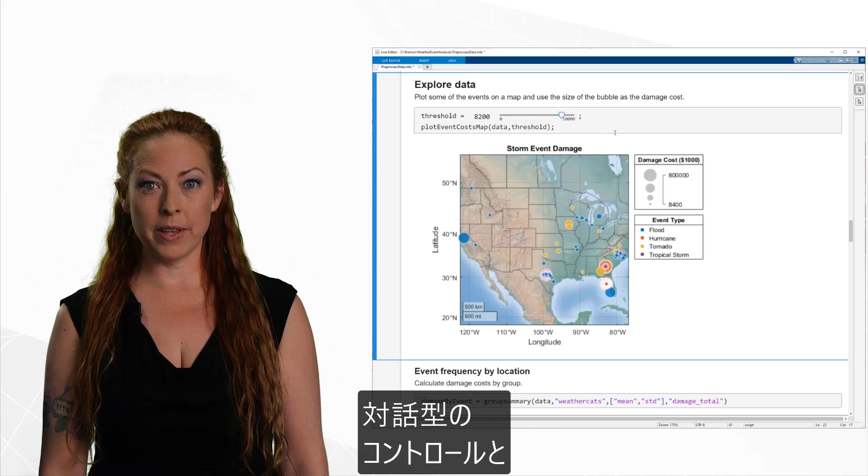The Live Editor is a great example of this, a notebook environment that helps you quickly explore your design space with interactive controls and embedded outputs. You can also use Live Editor tasks. These are small apps that you can embed right into your script that do the coding for you.

Thinking back to Tanya's keynote, maybe we want statistics related to air quality based on a location. The Compute by Group task will come to the rescue. You select the groups, the variables, and which calculations to apply to each group, and you do all of this without writing any code yourself. Of course, the task will automatically generate the corresponding MATLAB code for you, so you can reuse it later.

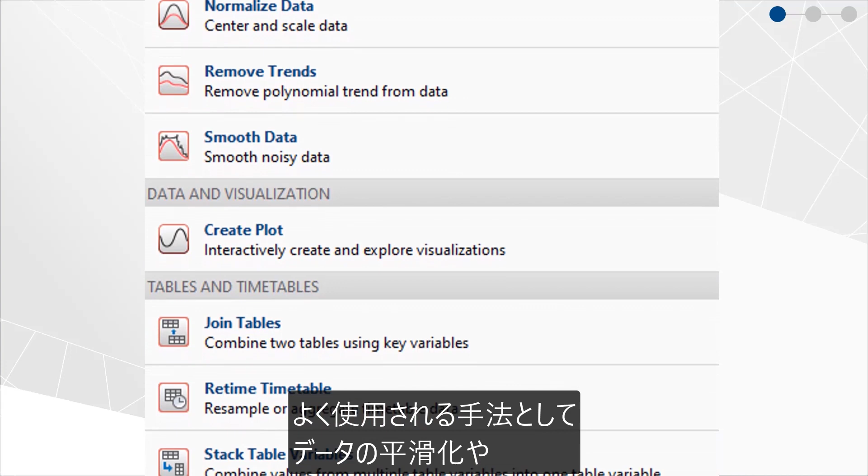There are dozens of tasks for common work like data cleaning and design, the sorts of things you tend to experiment with and try different techniques on, like smoothing, resampling and synchronizing data, clustering, and more application-specific tasks like controls, predictive maintenance, and filter design.

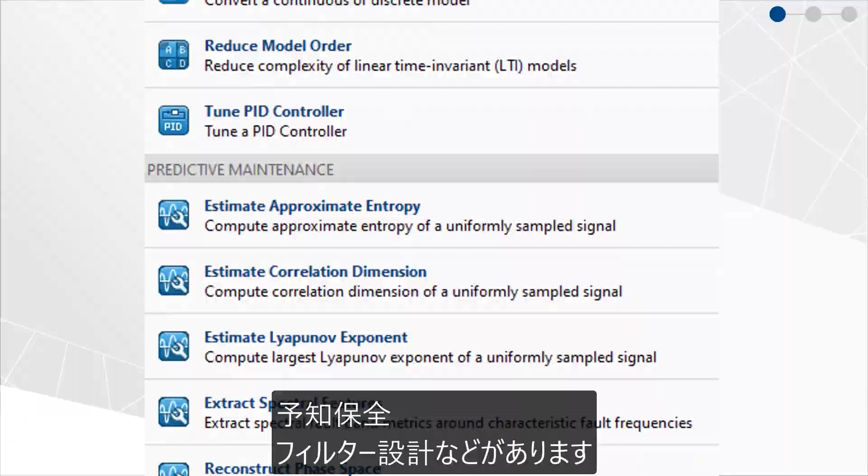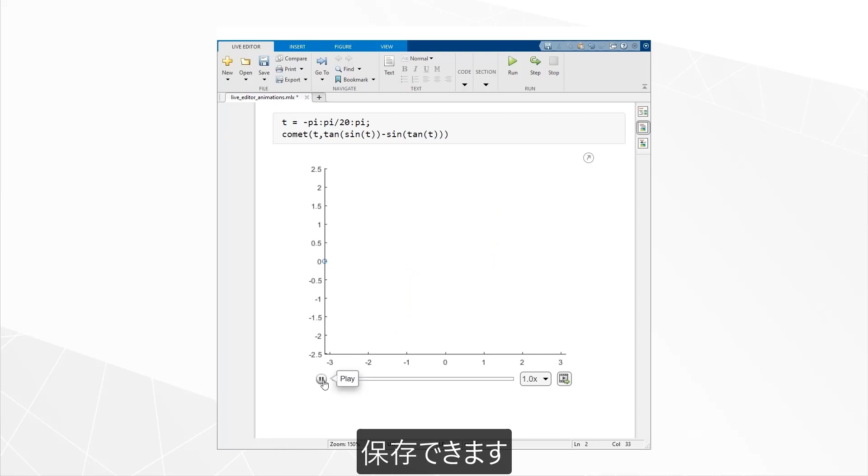Live tasks aren't the only ways to interact with scripts. We mentioned the interactive outputs. You can now animate outputs with playback controls, then save it as an animated GIF or a movie file just with one click. This makes creating and saving animations much easier, especially if you've ever had to capture frames in a loop like in the old days.

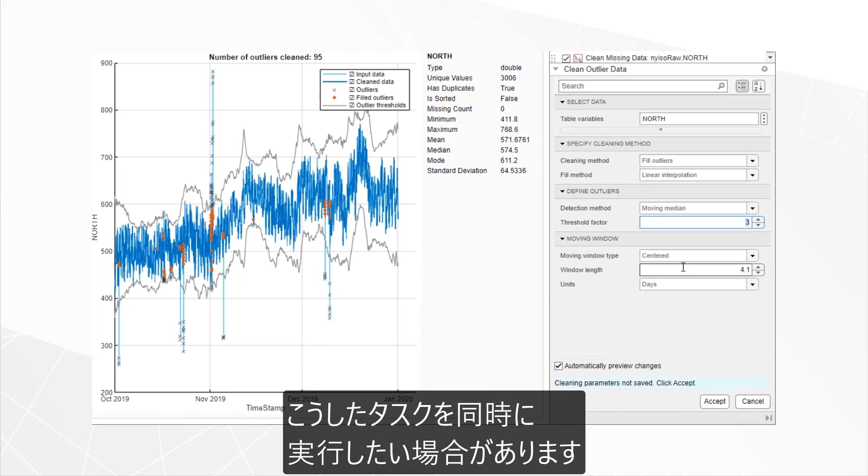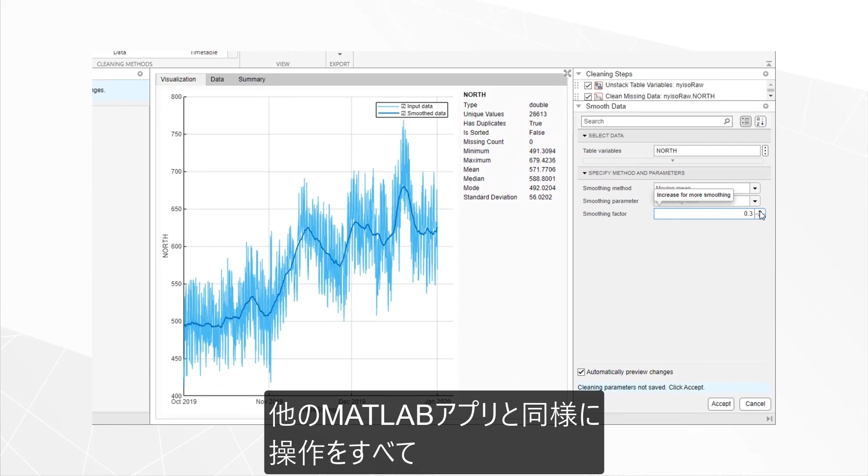So we talked about tasks that clean up your data, like smoothing and resampling, but often you want to do all of these tasks at the same time, and that's where the Data Cleaner app comes in. You can experiment, try different methods, just like we saw with the live tasks, but all in one place. And just like other MATLAB apps, it keeps track of everything that you did. So when you're done exploring, you can generate the code and use that to automate the process later on.

Now, that's not to say we don't care about coding. Even coding is easier in the traditional editor, starting with those code suggestions that you saw before. No need to stop and look at the documentation when you're on a roll.

Then let's say you want to edit several variables. You can make a single edit that applies across all the lines you selected. When you're finished exploring and you're ready to make a function, you can select the code and convert it. And once you have that function, you can easily debug it using an inline tool with many options for navigating and updating to help make coding even easier.

With Simulink, our goal is to help you spend as little time and effort as possible to build and edit your models. You should be able to focus on your work and not the tools. In other words, we want you to edit at the speed of thought. So with that in mind, we've added a new tool that makes it easier to navigate around your models.

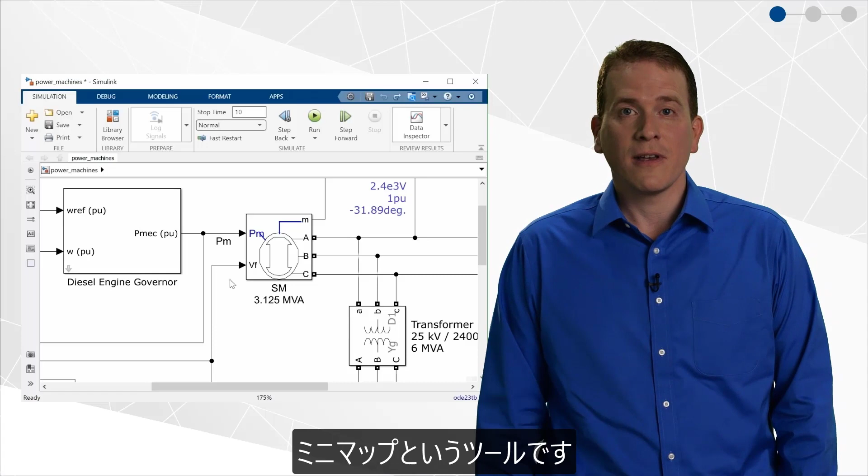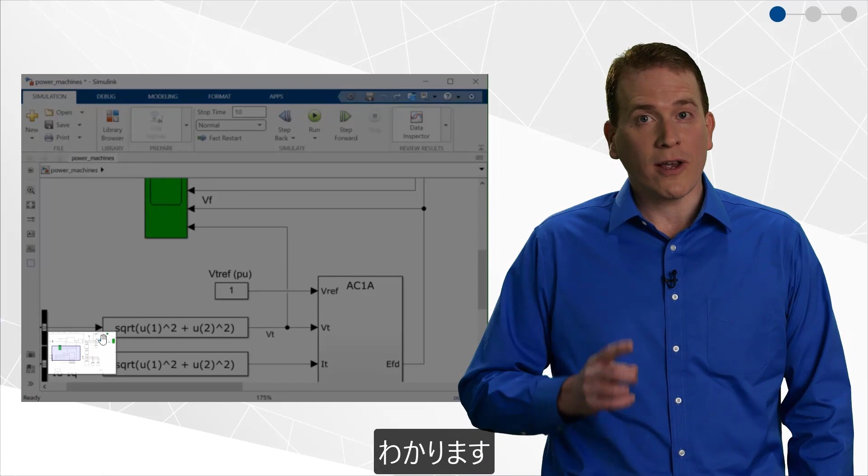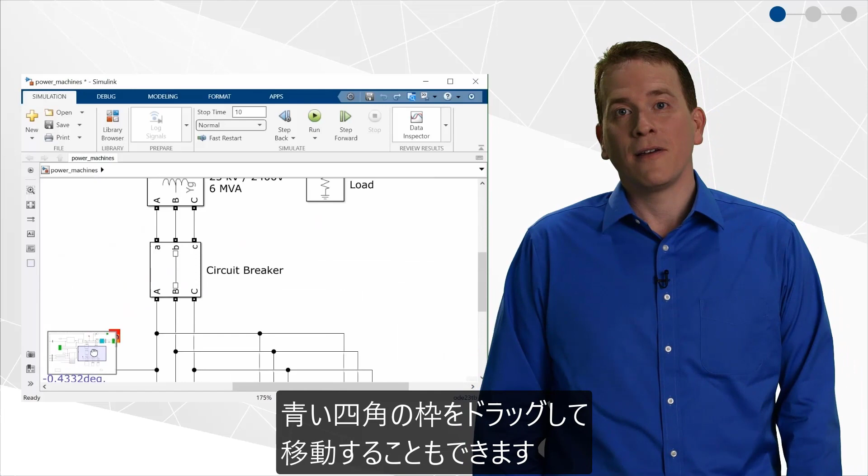It's called the Minimap. The Minimap automatically appears on the lower left of your screen when you pan around your model. At a glance, you can see where you are in the model by looking at the blue box. You can click anywhere in the Minimap to go to that place, or drag the blue box around to pan around that way. Once you're done, the Minimap automatically goes away until you pan around your model again.

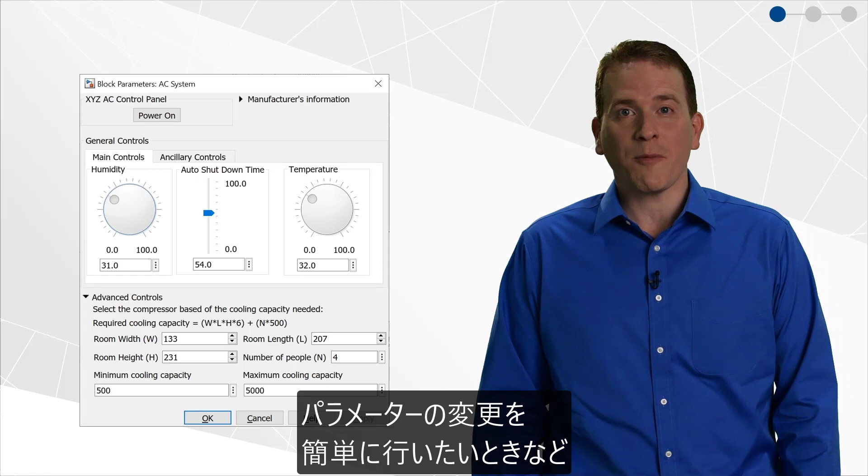For model creation, we've made a big update to the masking editor. Masks, as many of you know, are what you see when you double-click on a block. And if you create your own custom masks to make it easier to access and change block parameters, I think you're really going to like the improvements we've made.

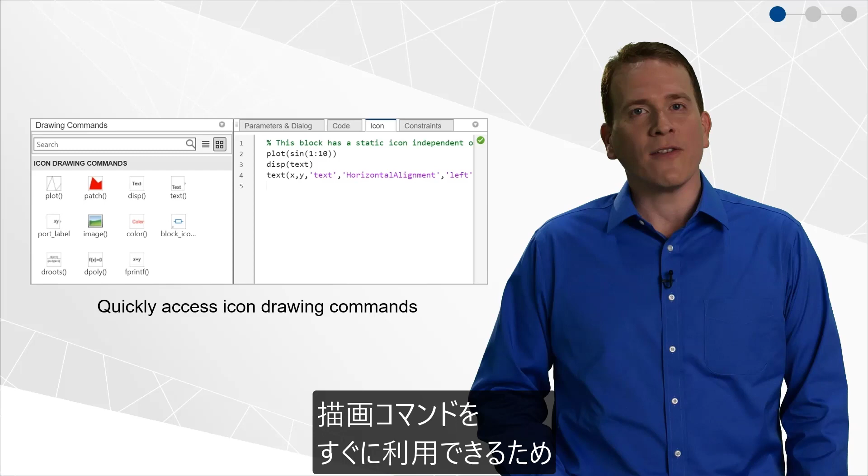First off, you can now copy a mask from an existing block. That way, you can pick a mask that's close to what you're looking for and then tweak that instead of starting from scratch. When you're creating the icon for the mask, you'll have quick access to the drawing commands so you don't have to remember them all. And if you really want a high level of control, you can now add constraints, like restricting parameters to specific data types or values.

All right, so we've gone over some things that will help you explore through your designs. Now, as designs evolve, they grow, both in size and complexity, which means you need to scale up your work and collaborate with others. The good news is that both MATLAB and Simulink grow with you as your needs grow.

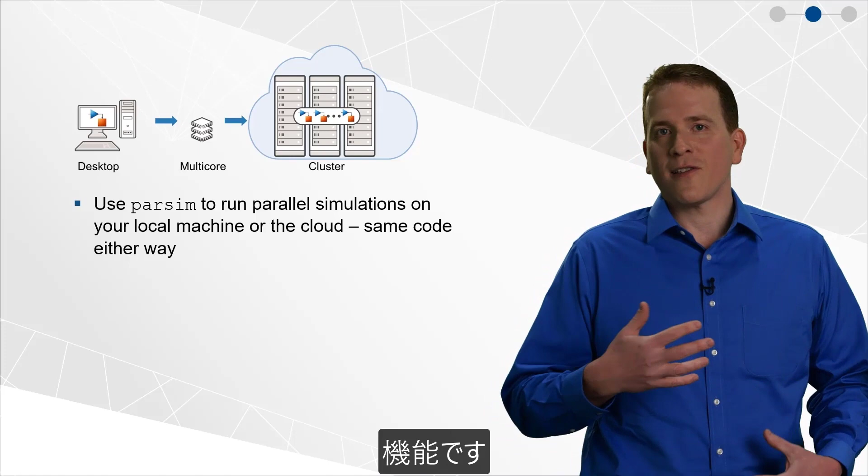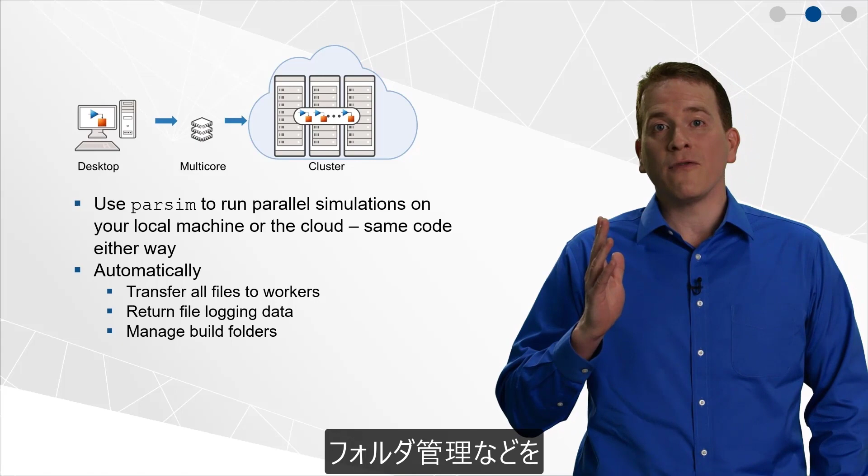A great example of this is running multiple simulations in parallel. Back in 2017, we released a feature called Parsim that makes it easy to run parallel simulations on your local multi-core machine or on the cloud with a full cluster of machines. It's the same code either way. Parsim automatically takes care of things that you had to code before, things like file transfer, logging, and managing build folders. It could all be done with a few lines of code.

But we asked, how can we make this process even easier? Introducing the Multiple Simulations panel. This is a new UI in Simulink for setting up multiple simulations, no code required. Just specify the parameters and variables in the model you want to change for each simulation, and then kick off a job and monitor its progress with the simulation manager.

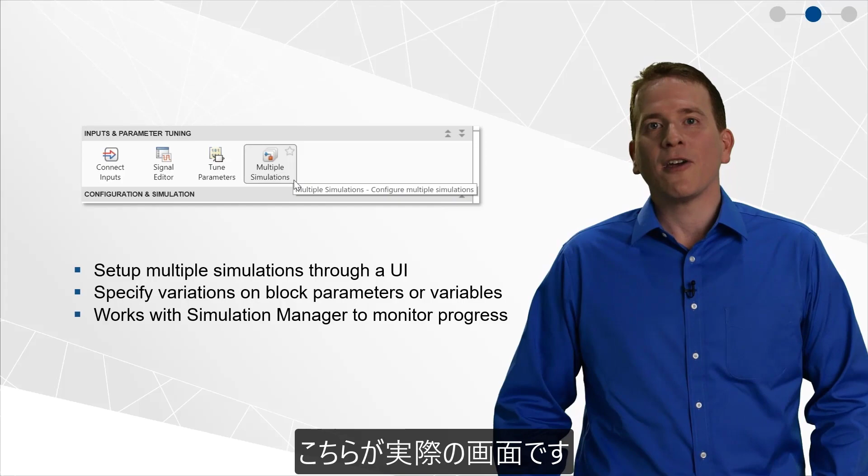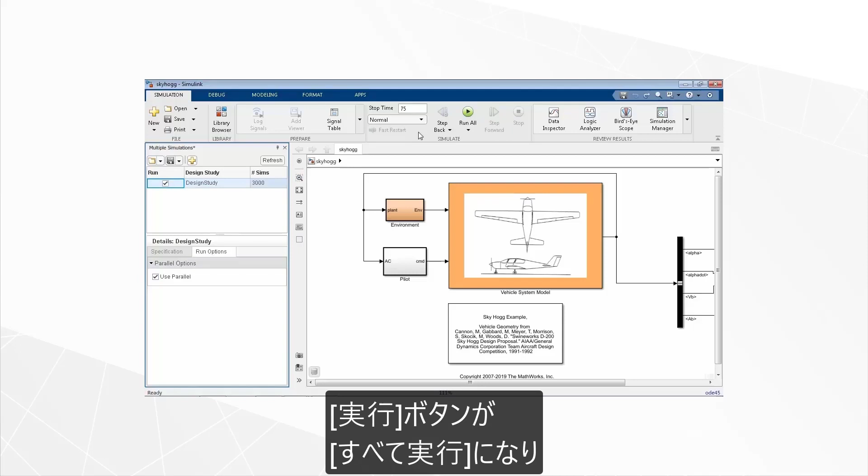Here it is in action. You open the Multiple Simulations panel, create a new design study, and then specify which parameters you want to change. If you want to run the simulations in parallel, just check the box on the Run options. Once you activate the design study, the Run button turns into the Run All button, and clicking that starts the job. The simulation manager shows the progress and automatically plots the results as each simulation is completed.

Thinking about those multiple simulations reminds me, if you've ever had MATLAB blocked by some long-running process or code, you're going to love this next update. You can run code in the background through multithreading, which was introduced in the last release. Here's a great example of importing lots of data, which normally would take a long time to run, and during that time, the command line would be blocked. Now you can use parfeval and other parallel functionality in MATLAB, so the code can run in the background.

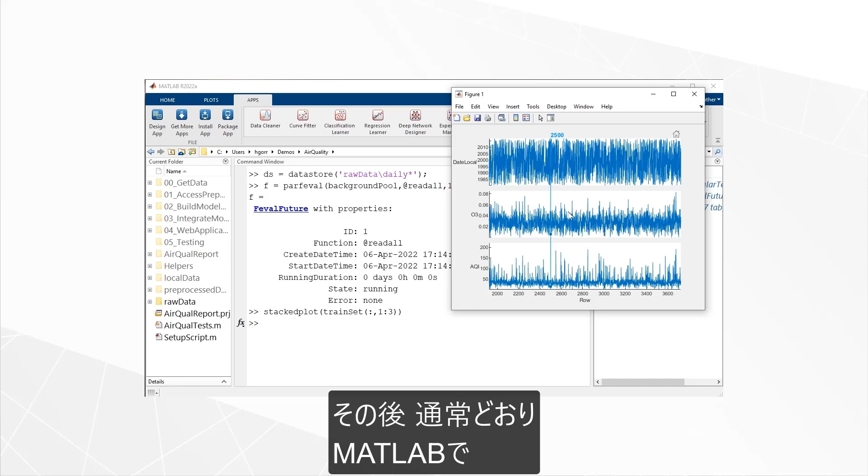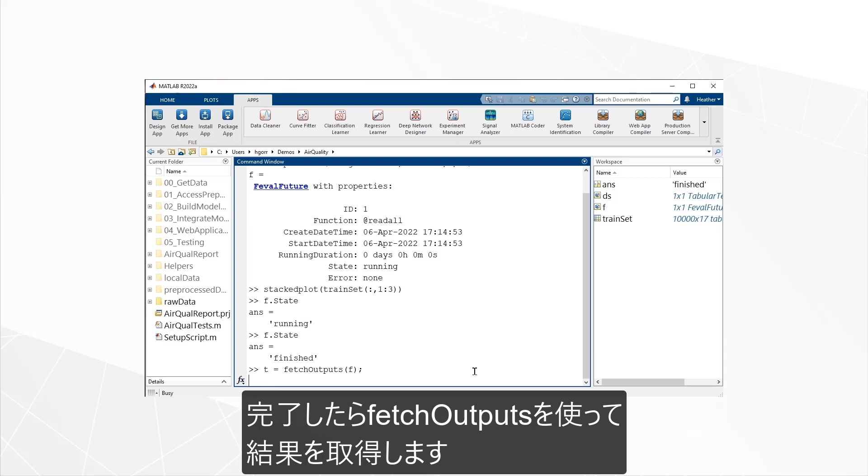Then you can continue to work like you usually do in MATLAB, like visualizing data and zooming and interacting with the plot. And you can check the status. Here, the data is still being read. Well, since it's still running, let's just keep going. Here, we're training machine learning models using an app. And once it's finished running, you can use fetchOutputs to get the results.

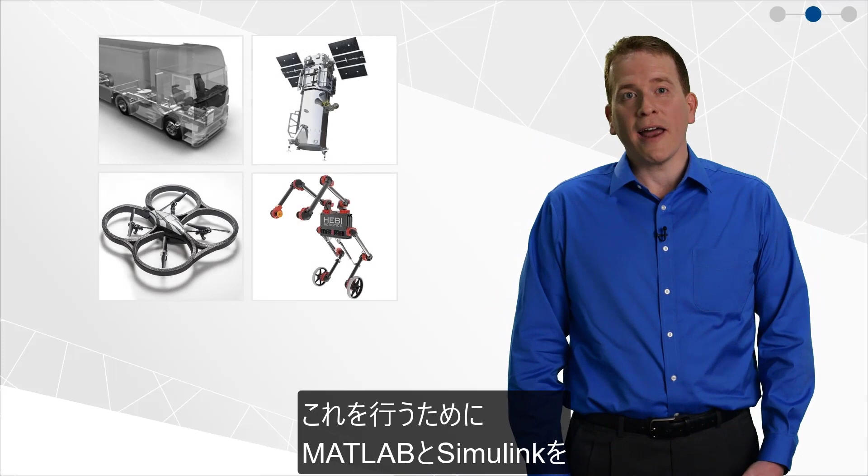So we've gone over new ways to scale up your simulations and computations. But scale is also about the scope of your design and building up a full model of your system. To do that, MATLAB and Simulink are often used together with other programming languages to design the different components that make up your system.

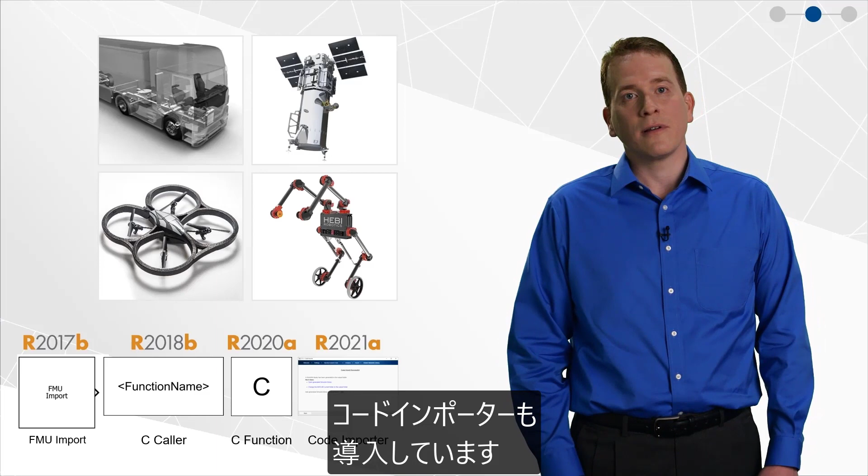Over the last several years, we've created several blocks to bring in FMUs and C code. Last year, we also introduced a code importer to guide you through the process of bringing in custom code. And this year, in 22A, the C function block now supports C++ code, which further expands the type of code that you can bring into Simulink.

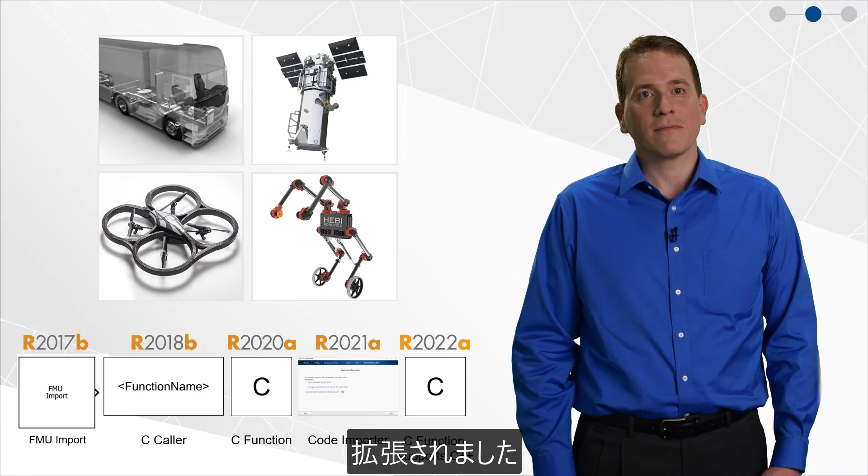Another big area of focus in language integration is using MATLAB with Python. It's gotten a lot of love over the last few years. As of last release, you can run commands and scripts using pyrun and pyrunfile. This just makes it easier to integrate.

You can run Python code from MATLAB now, no matter how it's organized, whether it's a bunch of commands, a script, or a module. And when you're going back and forth between the languages, you can use the syntax you're most familiar with. You can use name equal value syntax to pass arguments throughout MATLAB, including in Python expressions.

And when you need to make changes, it's even easier to edit that code. The MATLAB editor now displays Python files with proper syntax highlighting. So you'll see the keywords, strings, and comments, and it even auto-indents and highlights delimiters to help view and edit the code no matter the language.

Of course, a big challenge with these integrations is how best to represent your data. We're always thinking about this and improving here, and one of the latest updates is for list and tuple types, which are very generic data types. So you need different options to convert those to the MATLAB type you want.

And now you can convert string and numeric data directly. And that's gotten even faster. MathWorks is always thinking about improving performance, and that's even true for the language integrations. This release, you'll notice the type conversions will be even faster, especially with larger multidimensional arrays.

Now we're talking about multiple languages, obviously things are starting to get complicated. And as we think about scaling and collaborating, testing code also becomes more important. Of course, unit testing capabilities have been around for ages in MATLAB. It's important to test our own code base. And this improves each release, becoming more and more friendly to any skill level.

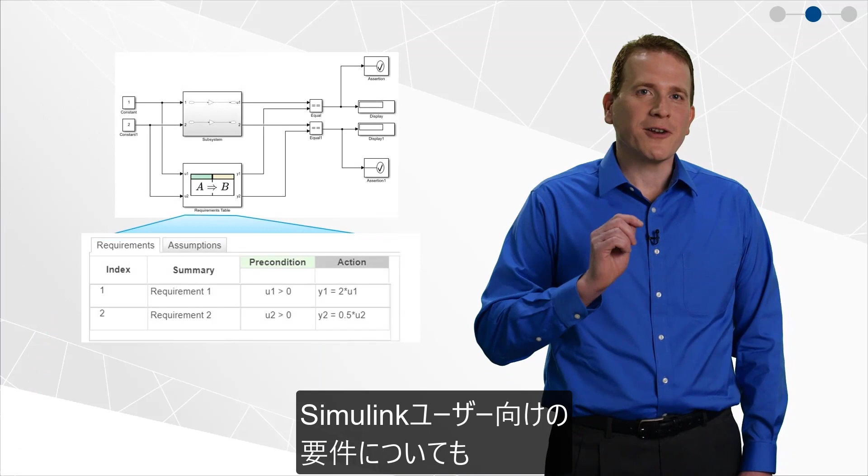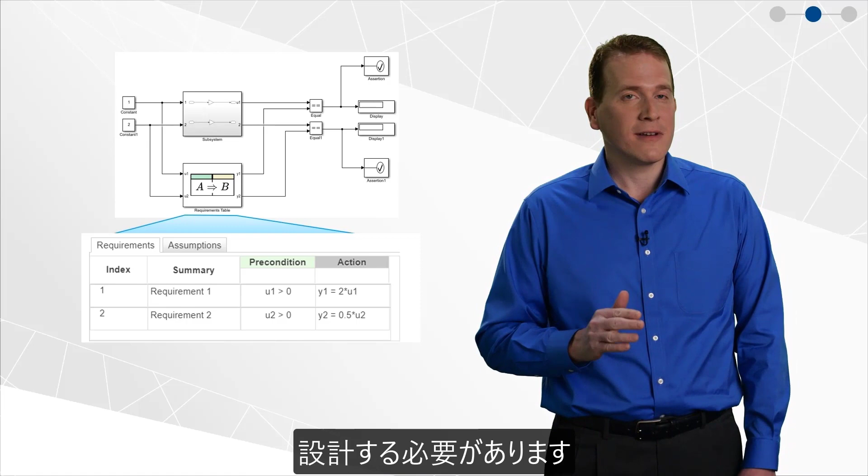We have something new in the area of requirements for Simulink users too. When you're designing your models, you want to make sure that the actual model behavior matches the required model behavior. So in 22A, we're introducing the requirements table block to do just that.

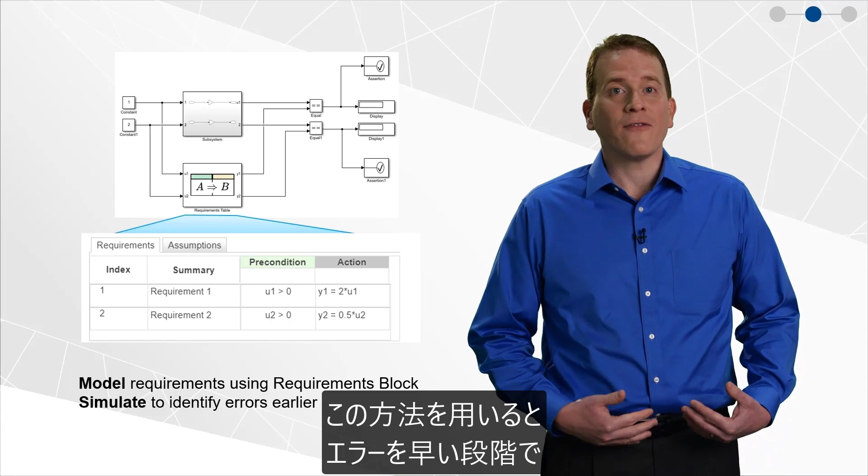With this block, you can model requirements in Simulink to evaluate logic both before and at runtime. That way, you can identify errors and fix them as early as possible, and be assured that your design requirements are both correct and consistent.

So these are just a few of the new ways to scale up your simulations and computations, work with other languages, and develop in a more collaborative way.

In this last section, we'll go over how MATLAB and Simulink can help you share all of your hard work. We spent a lot of time talking about features that we've made at MathWorks, but there are also features to help you make your own features.

Users love the live editor tasks we showed earlier, and now you can build your own custom live editor tasks to do whatever you need.

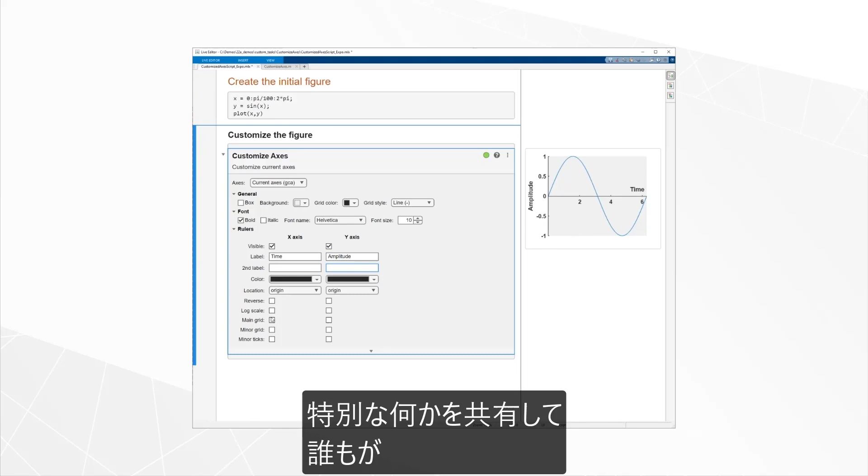This is a great example from Yair Altman, a frequent contributor on MATLAB Central. This task adds to the interactive capabilities for customizing the axes of a figure. Imagine sharing something specific with your team or research group, so everyone can create the same kind of plots with the same options. These will even show up in the dropdown with the other live tasks. What a great example of customizing and sharing, creating something easily shared with others.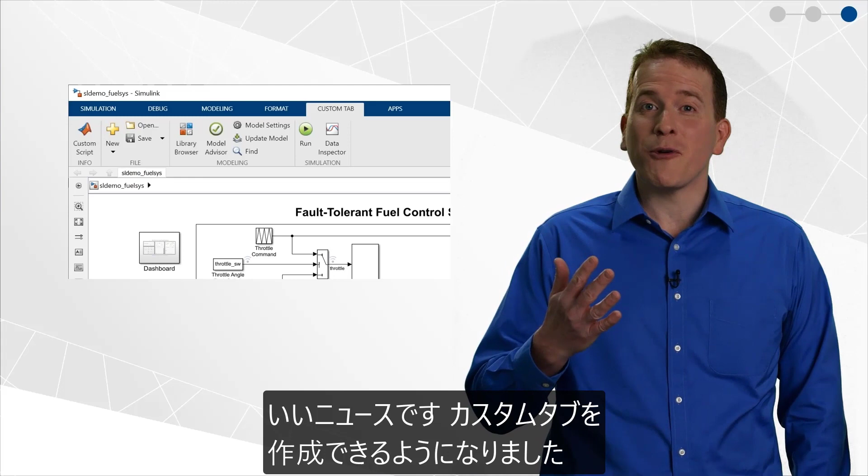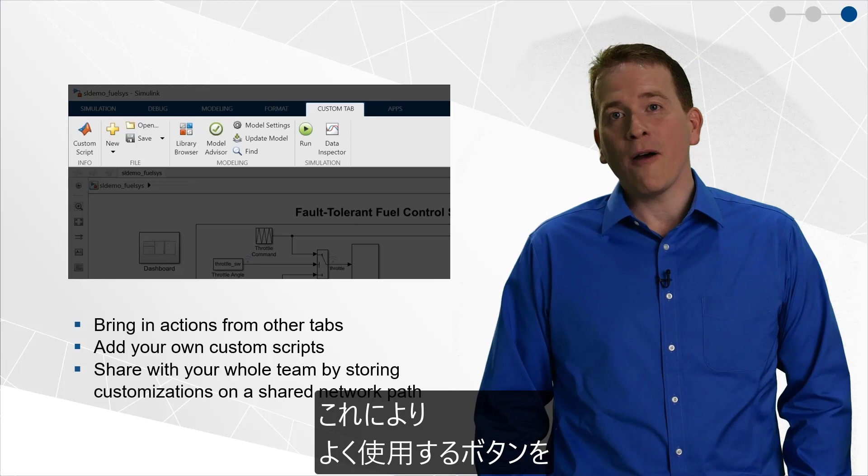Speaking of customization, when we introduced the Simulink tool strip back in 19B, a common question we got was, can I create my own custom tab in the tool strip? Well, I'm happy to report that you can now do this. In your tab, you can add your own custom scripts along with whatever buttons and actions you want to bring in from other tabs, so you can access the buttons you use most in one place. And if you'd like, you can also share your customizations with your whole team.

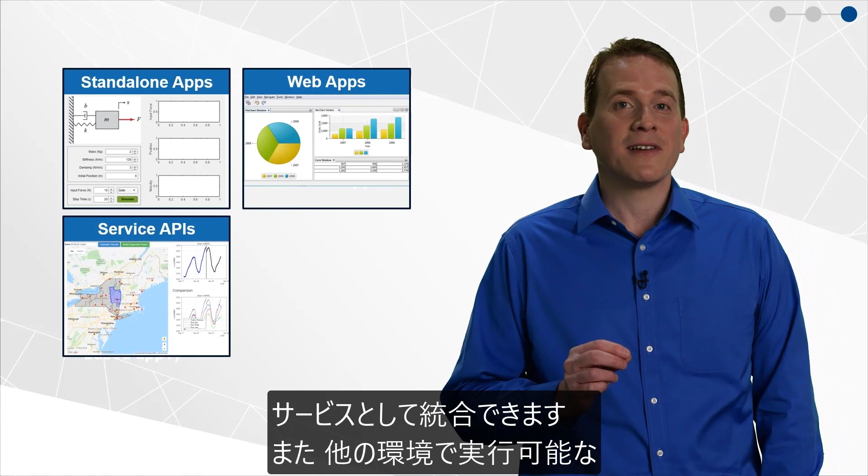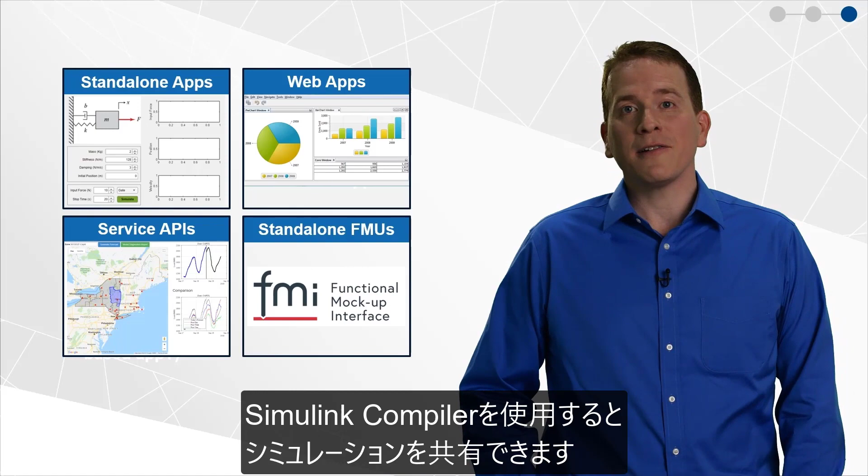Now you may want to go beyond just sharing customizations and create standalone applications and web apps, integrate into enterprise applications as services, or create standalone simulations that can run in other simulation environments. That's where Simulink Compiler comes in. With Simulink Compiler, you can share your simulations with others, often with an app. To do that, you would create an app in App Designer, write some MATLAB code to access model parameters, and then run the simulation and generate results in an app.

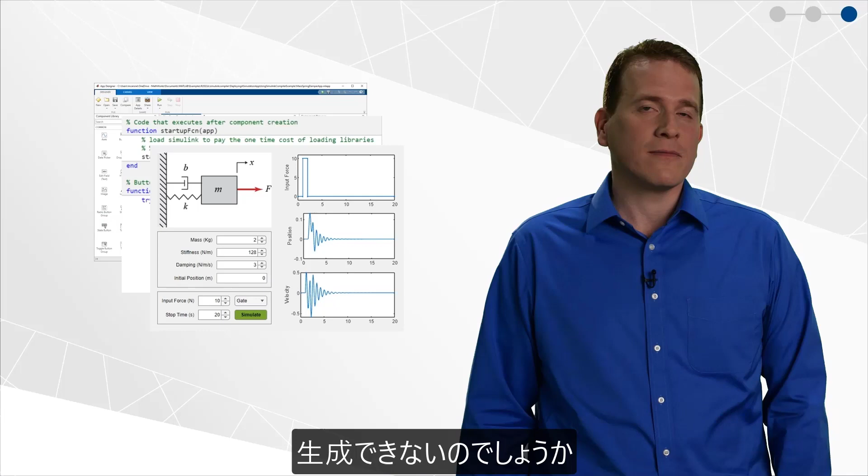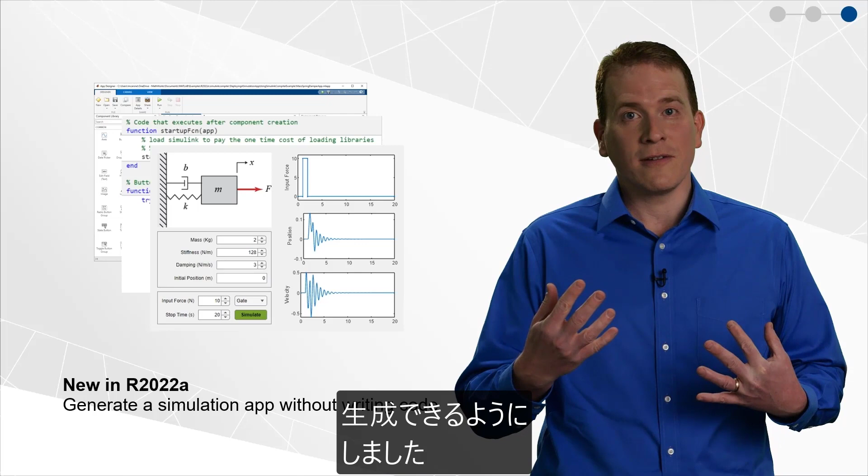Now you might be thinking, that's great, but I can automatically generate code from my model, so why can't I automatically generate an app from my model too? And you know what, you're right. So in 22A, we've made it so that you can automatically generate an app from your Simulink model without having to write any code. Here's a look so you can see how it works.

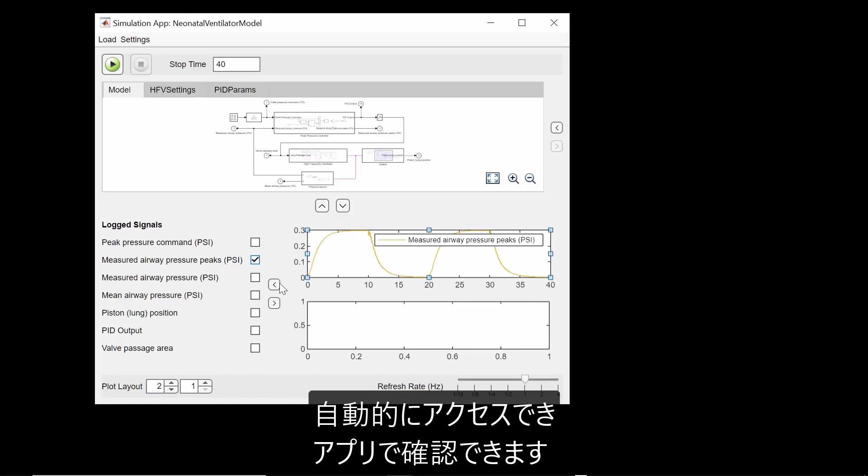To create the app, you use the GenApp function in the Simulink Compiler. The app is generated, and you can then start the simulation from the app itself. You automatically get access to model parameters and logged signals, which you can view in the app. And if you'd like, you can customize the app further, similar to the masking workflow we went over earlier.

Of course, one of the most important ways of sharing and collaborating is through the cloud. This is not big news, but there are improvements in the community every day. Docker containers are very popular. A container has everything you need to run an application as an isolated process: executable, dependencies, configuration, and data. If you want to put MATLAB in a container to integrate with a CI/CD pipeline, for example, there are instructions to do that on GitHub.

And in the spirit of sharing, this is also true for different cloud providers. There are many examples, apps, and even Simulink models on the MathWorks GitHub page. But maybe you want to create microservices, which are more like independent services or applications. These are typically implemented as Docker containers, and now you can publish your MATLAB functions as Docker microservices with a few simple commands, then add them to custom applications, web, and enterprise systems.

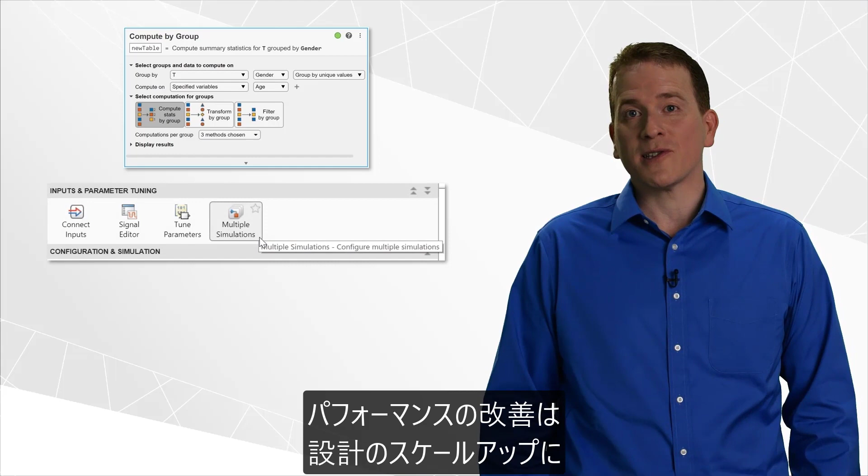So let's recap. We covered a lot of ground in the last 20 or so minutes: editing and navigation improvements to help you explore and analyze your designs, performance improvements to scale up your designs for production, and new sharing capabilities to bring more people closer to your design.

Now, I know you're super excited to upgrade to the latest version after hearing this talk. And when you do, there's an app to help you. It'll detect possible issues in your code using the latest version. And if you use projects, you can analyze all the MATLAB code and Simulink models in that project and automatically apply fixes to help you with that upgrade.

Tanya referenced the free on-ramps that are available to learn MATLAB, Simulink, and related products. You can also now take the Simulink Fundamentals training as a self-paced course. Everything is available online or on your local machine if you already have Simulink installed.